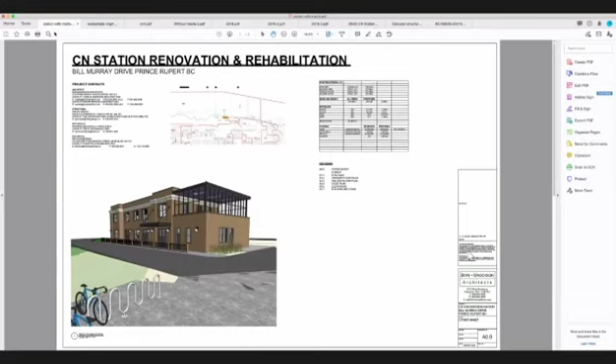If some of you didn't know, the way you used to access this building was you walked across this elevated trestle that crossed over the railway tracks. At the end of the trestle, you went down a set of stairs and you ended up on the second floor of the station where the ticketing occurred on the upper floor. And then there was a major straight staircase that continued down to the ground floor where there were waiting rooms on either end of the building, one for men and one for women.

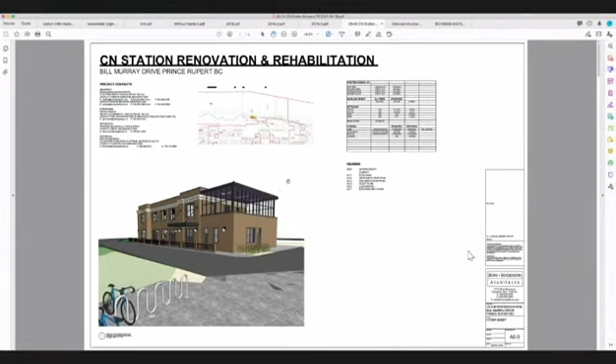This is our civil site plan for the project. The orientation shows due north at the very top of the page. The property consists of this property line shown in blue on the civil site plan, which is quite an odd shape, coming to a very pointed configuration at the north end of the site. The building is quite tight to its property line—we have 14 feet from the back of the building to the railway tracks, and only 7 feet from the face of the building to the property line at the front, slightly more where the building recesses between the two front entry doors.

With the help of Hans Seidemann and Paul Vinditelli, we've managed to explore and research our sewer and storm connection, shown here between the building and the waterfront. We have a water main here right in front of the building, and potential power supply from BC Hydro here to the north of the site and down here to the south in the waterfront park.

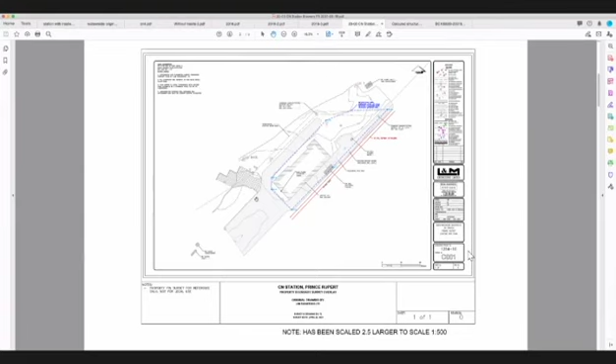This is our architectural site plan, which shows a little bit more of the waterfront park. We're going to take advantage of this existing parking arrangement and add some parallel parking along the tracks. Excuse me, I'm just going to get some water.

So we're going to have some parallel parking that we'll employ along parallel to the railway tracks. We're going to have a loading dock here at the end of the building.

Most of the servicing, delivery, and loading will happen along the track side of the building. And as most of you are aware, there's going to be a new road constructed right in front of the CN station building that's going to lead to the new ferry terminal, which will be just off of this drawing.

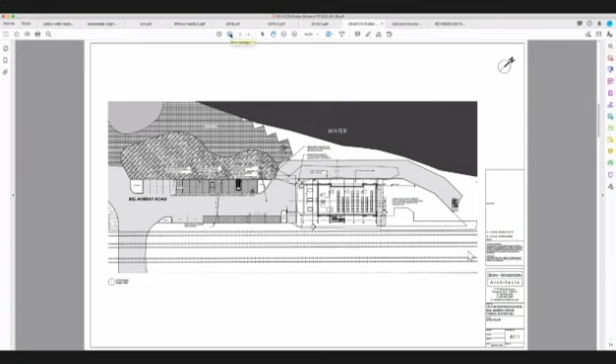This is a very interesting drawing. This is the original foundation plan for the building. And one of the things that we have to do with the reconstruction of the building is we have to seismically upgrade it. And to seismically upgrade a masonry building involves quite a bit of work, and I'll try and explain some of that because it's proving to be a greater portion of the building project cost than originally anticipated.

That work is well underway in terms of design, and within the next month, we're going to be actually beginning that seismic upgrade. So this is the foundation plan, and I'll share with you in a few minutes the new design for that foundation.

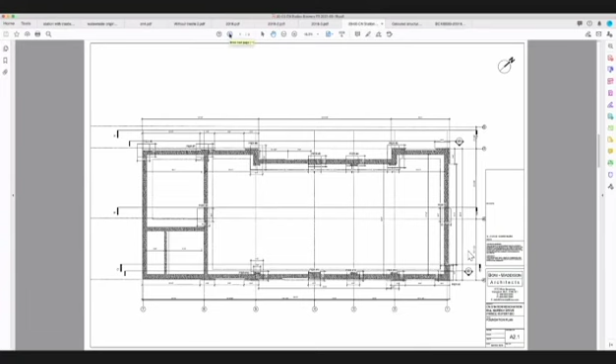So now we're getting into the meat of the building. This is the ground floor plan. And as most everyone is aware, the Wheelhouse Brewery will be the first tenant in the building.

To accommodate them, their brewery operation is going to be in the north end of the building, in the first bay. But to accommodate the height of their brewery vessels in this end, we're going to remove the second floor out of this bay so that these towers can fit into the building.

And then the production on the ground floor stretches behind here with their packing and canning operation. And then their keg cooler sits behind their taps bar.

So essentially the back of house on the track side is all production and back of house, whereas the front area leading in from the front door that we'll use here and leading in through the retail portion of the building and their communal seating arrangement, and then public washrooms.

We have 3 gender neutral washrooms, one of them being accessible. And then in the single story building at this end, we have a small commercial kitchen that will serve the patrons. There's a stair here that comes up and goes around and up to the second floor. There's a staff washroom and some janitorial facilities and an electrical room on the ground floor.

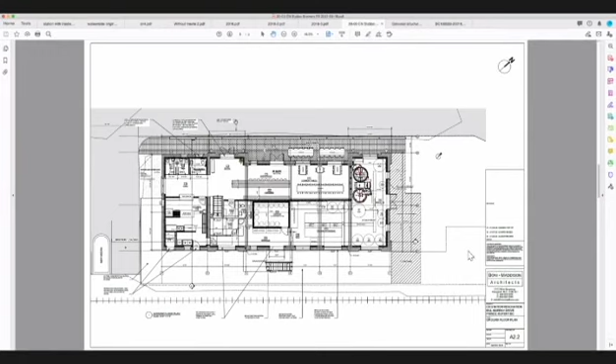When we move up to the second floor, you come up the stairs here, a new set of stairs that brings you up to the second floor.

The interesting feature on the second floor is the enclosure of this single story portion of the building with a new glazed wall system and a new metal roof on top of it with skylights in that roof. And this will really be the kind of feature place for the brewery with overview to the harbor.

And all of these windows, we'll set up to be operable. So this will feel like you're outside in decent weather. The brewery will enjoy an office upstairs and a meeting and staff room, a washroom to serve the patio upstairs.

And then the 2-story space at this end of the building, which will house the tops of the brewery vats, will also connect to this area where the brewery will store its grains, and the grains will be fed down into the production from above.

This is a new set of steel stairs that we're going to build on the back of the building that will allow access up to this floor, as well as a means of egress, a second means of egress from the upper floor. This space we are referring to as 'other' at the moment. There is a potential for a residential component upstairs, or a caretaker suite or something like that.

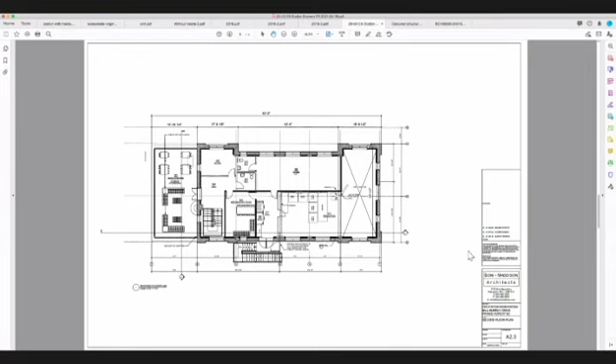This is the roof plan that I mentioned earlier, shown on our architectural site plan. This piece of the roof on the main building is being rebuilt, re-sloped, and re-insulated. This drawing shows the mechanical equipment that will be positioned on the roof, as well as the potential for future solar panels on this portion.

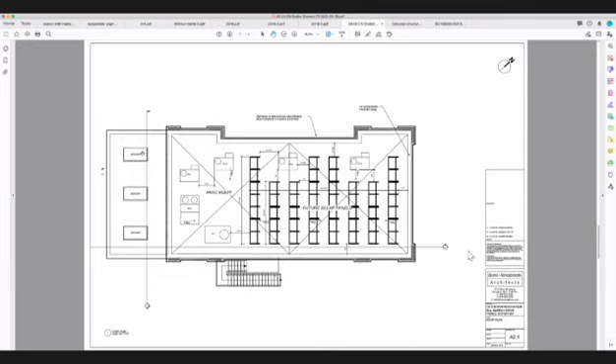This is the flat roof of the conservatory with some skylights over that space.

And then these are the building renderings. The color rendition on the computer isn't very good, but we're not changing the color of the building by any means. We're maintaining the existing masonry, and it will be cleaned. It will end up being a bit more of a sandy color than it shows now in its present condition, once the building is cleaned and the masonry is repointed.

Interestingly, over time, windows and doors have been swapped around in the building. Some openings which were originally windows have become doors, and vice versa. Our heritage consultant is very cooperative about that - it's not a strict rule about how to do the restoration, because we're not doing a truly historical restoration, we're doing adaptive reuse of the building. So he's very lenient about how we do it. The doors and windows will actually serve the brewery tenant inside for their layout.

For instance, on the back of the building, we're going to take this opening next to the new stairs, and we're going to put a rolling shutter door here that accesses the production portion of the brewery.

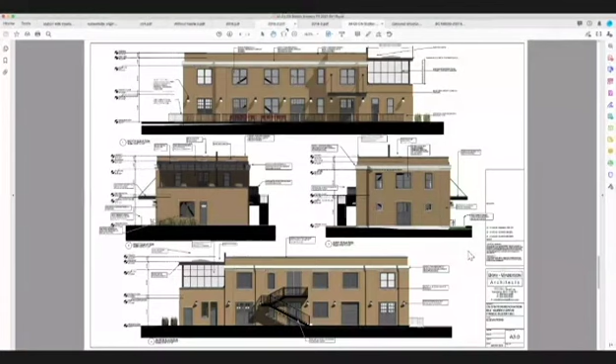And then this final drawing in this little set are the building sections. When I show you the structural drawings, I'll talk a bit about these big seismic braces that we have to install in the building - they're part of the seismic upgrade.

These are metal frames that will be implemented both on the ground floor and the second floor, in certain locations, not everywhere. This upper drawing is a section through the length of the building, with the conservatory on the upper left and the commercial kitchen below it.

This is a section cut through the stairs that come up from the ground floor. This would be the little reception meeting room on the upper floor. This is the production space connected to the two-story space, and the production back of house on the ground floor. This section would have the track on the left and the waterfront on the right.

This one is the reverse of that - a section through production, and similarly the production area where the grain is stored upstairs. This is the space that has been labeled 'other' until the use is determined.

And then this is the front of house, the bar area on the water side, and you can see the entry canopy on the front of the building.

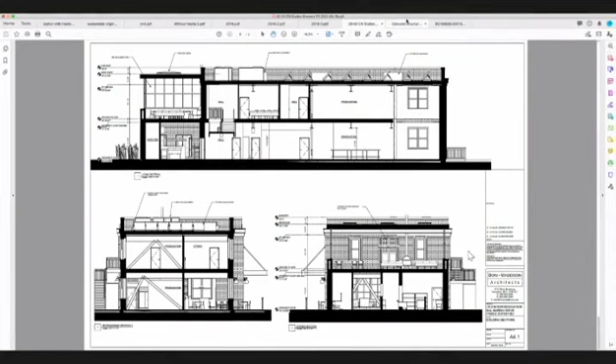Going away from the architecture for just a minute - this is a drawing that shows the seismic upgrade of the building.

These yellow/orange lines represent new grade beams that are going to be built. We're going to remove the concrete slab from the building entirely, in both the single and two-story portions, and essentially rebuild the foundation. These orange lines represent a grid of new grade beams that will be supported on micropiles, and then the slab will be replaced above this grid.

As I mentioned, there's a requirement for this steel bracing. There's actually a steel brace on this grid line, number 4, then down through the middle of the building, and returning in a Z fashion on this grid line, number 2. Coincident with those braces are these diagonal members that go from floor to ceiling, both on the ground floor and the upper floor.

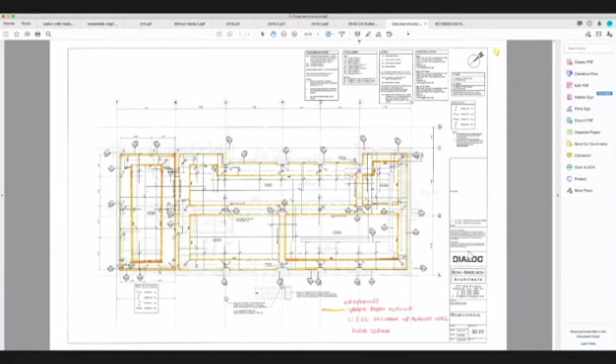One of the things we're doing on the structural side as part of the structural upgrade is we have to brace the building for seismic reasons, and we also have to support the exterior masonry walls. We have to support the bricks so they don't fall down, because they don't have any resistance to seismic movement if the building were to move.

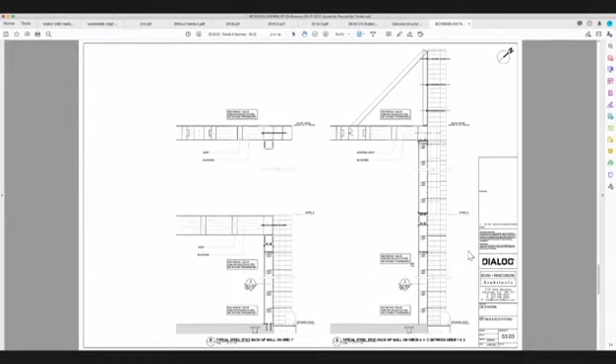So the proposal right now is to build up against the masonry wall a steel stud wall that's pinned back to the masonry on the inside at repeating intervals. This steel stud wall will be insulated, vapor barriered, and drywalled on the inside to provide the thermal insulation we need. This system of steel studs will run around the entire perimeter of the building and brace these two-story masonry walls. This line in the drawing is actually the roof line, and up on the roof we'll also have a series of braces that support the roof parapet on the upper portion.

This set of drawings is fairly well developed, and this will form the first portion of the work. You can see in these structural details the thickness of the grade beams being employed on the ground floor, and these little drawings off to the left show the micropile installation that supports the grade beams.

The underside of the existing slab in the CN station, we've learned, has voids under it, and there are portions of the building supported on existing grade beams with existing concrete columns that go down to bedrock. So apart from the single story section, the building has never settled. It's well founded, but it never had any seismic ability that meets present day codes.

So that's why there's this extensive work going on the ground floor. Probably with that ramble, I'm certainly happy to welcome any questions about anything that I've talked about or shown.

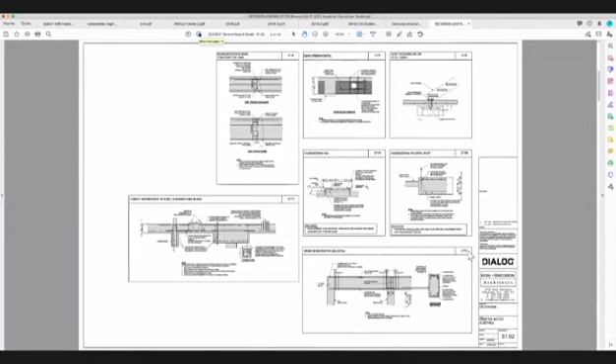Okay, I can show you more of this particular set of drawings, because this is the set we'll use for our building permit, our foundation permit drawings. The colored drawing I showed you earlier with the orange and yellow lines is actually this drawing, but I colored it because it has so many lines on it that it's a little hard to read. As I mentioned, we're going to cut the slab out of the existing building and remove it, both in the single-story portion of the building at this end, as well as in the main portion of the building here.

Then, to reinforce the building seismically, we build this new perimeter grade beam that goes all the way around the building. It crosses the short distance of the building here, and there's a grade beam that runs down the middle of the building. In this portion of the building, there's a grade beam that surrounds the perimeter on the inside. At all of the nodes where the grid lines meet, underneath the grade beam, there are going to be a series of micropiles.

On the outside wall, there's a single micropile. In the middle of the building, there are actually a pair of micropiles. So first they'll go in and set the micropiles, then they'll form the grade beams, and then pour the concrete grade beams around the perimeter of the building. Then the floor slab will be put back into the building, and it'll be a suspended slab, supported on the grade beams and the micropiles. So we'll end up with a completely new floor system on the ground floor.

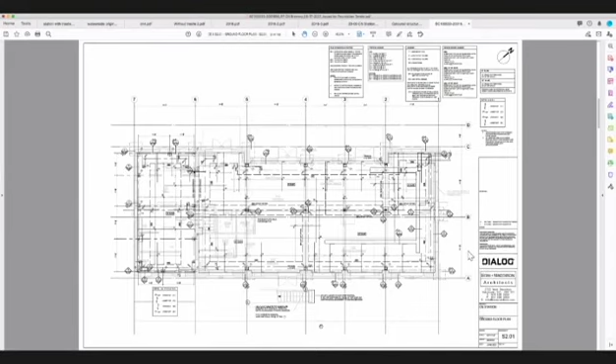This drawing also shows that when we reform the floor slab, we're going to have a new trench drain system in the production area of the building for the brewery. This L-shaped line here is a set of floor drains, trench drains in the production area.

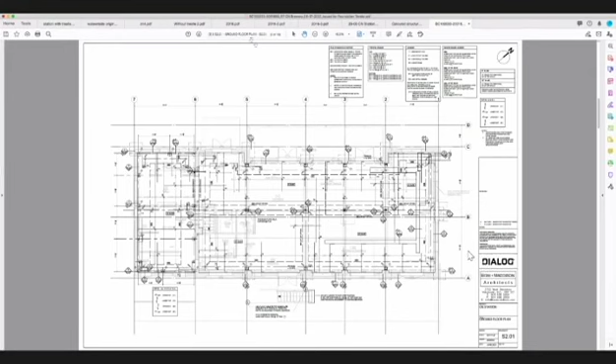This drawing shows the structural steel that will be employed at the second floor level. In the single-story building, we're creating a new steel frame on the interior of the masonry, with columns in every corner and at the midpoints on these walls. That steel frame will be two stories high and carry the roof over the new outdoor patio above. The roof of the single-story building has collapsed, so it needs to be reconstructed anyway. We'll build a new floor at the second floor level for this outdoor patio space under the conservatory, but it'll be supported on a new steel frame interior to the masonry. So in this portion of the building, we won't be relying on the masonry to support the new second floor or the roof — it'll all be independent of that structure.

Similarly, we have this main structural line that runs down the middle of the building floor plan, and it's a steel frame that ties together with the existing steel beams that run in the other direction. In the two-story space where we're removing the floor, we're going to have another steel frame that runs around the perimeter of this space, as well as a beam flying across at the second floor level to support these walls, which will then become two-story tall in this end of the building.

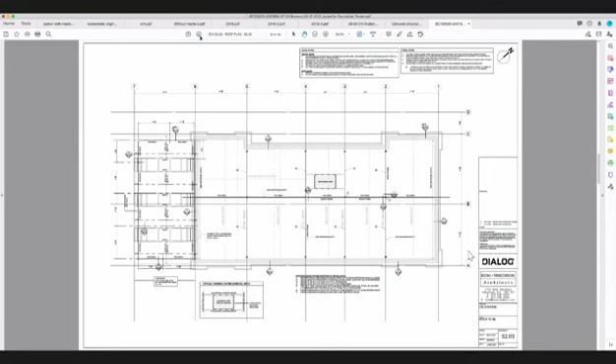This drawing, in detail number 5, shows where we're going to do a trench drain. We have to actually increase the depth of the floor slab to allow for that material loss at that level. And this is a trench drain in the other direction, where that slab is actually a little bit shallower.

And then there are details that show the reinforcing that's required, where we have a steel column coming down, and it needs to be pinned to the new grade beam.

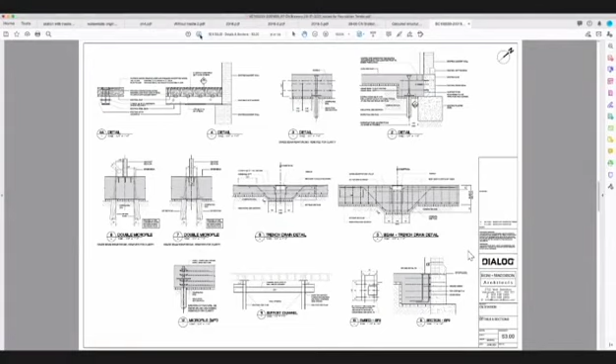And again, these are some of the details. The details in the upper left-hand corner show what happens for the structural upgrades in plan view. So this is a steel column that also gets fixed to the masonry wall with these masonry ties. They drill through the brickwork and then tie the new steel column to the wall. And that steel column is in line with the steel stud wall that we will insulate and drywall on the inside.

So those are part of those plan details. This is where we have a concrete block wall or a tile wall, and this is where we have a pilaster, where we have actually 3 rows of bricks forming the wall structure. Again, this detail shows the steel stud wall up against the masonry wall. And then the reinforcing - there's blocking required at the floor level to tie the floors into the masonry as well, both at the roof level and at the second floor level.

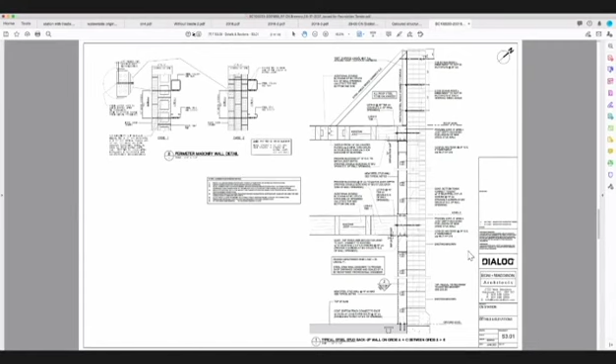These are slightly simpler sections, but you see the concept in plan view, and then in elevation again. There's a section line shown here, so the second floor isn't shown in this drawing. But in the case of the brewery in the north end of the building, this would be a 2-story high wall with the parapet extending above the roof level.

So I hope that answered some more of your questions about foundation.

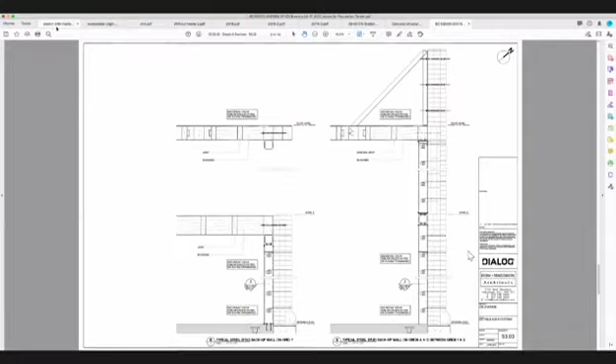Thank you very much. I think at this point, Mr. Madison, I have some questions for city staff, but we have it on our agenda tonight at item 4C, so we'll reserve it for there. But I think we're good on questions. I just want to thank you and your staff for your time, and I'll ask that at this meeting.

Yeah, and your team's done a phenomenal job. The design looks awesome. I'm very stoked for the, what do you call it, a conservancy? Or the rooftop patio, that looks amazing. So yeah, great job, it's going to be a great historical build. And again, I have some questions for staff around financing and schedules and stuff like that, but we'll reserve that for our regular meeting.

Is there anything else on your end, Mr. Madison? No, that was it from me. Thanks very much. Thank you. Great work, thank you again. We'll be talking to you again soon. Okay, all right. Thank you all, have a great evening.

Okay, moving on. The entire member of the audience has left, unless there's anyone in the audience that has something they would like to talk to council about this evening. And I'm having a feeling that those aren't there.

So I'd entertain a motion to adjourn the committee of the whole and reconvene the regular meeting. Moved by Councilor Renhowa, second by Councilor Aldy. All those in favor? Any opposed?

Motion's carried. Recommendation that the agenda for the regular council meeting of August 23rd, 2021 be adopted with addition item 5C, official community plan amendment application, bylaw number 3472-2021, and rezoning application ZBLA 2102, bylaw number 3473-2021. Moved by Councilor Cunningham, second by Councilor Skelton Morvan.